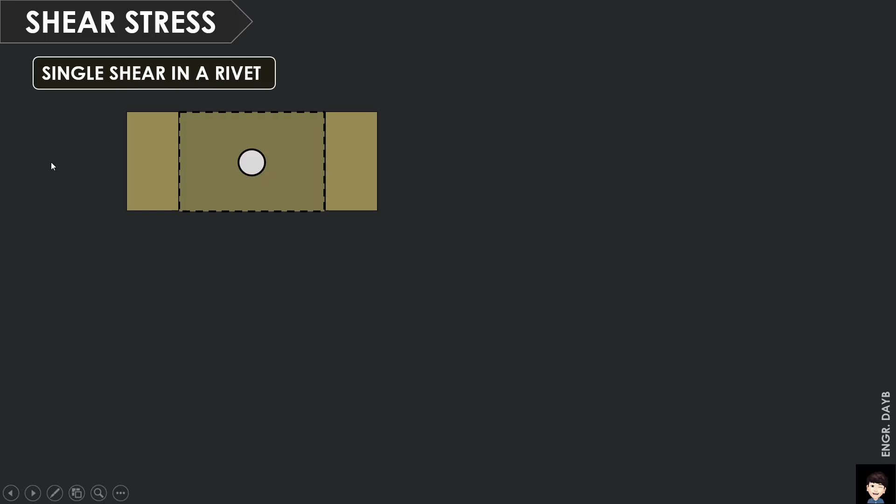Let's use a pointer. This is our rivet, the white or gray part, as a top view. Then this brown part represents your plates.

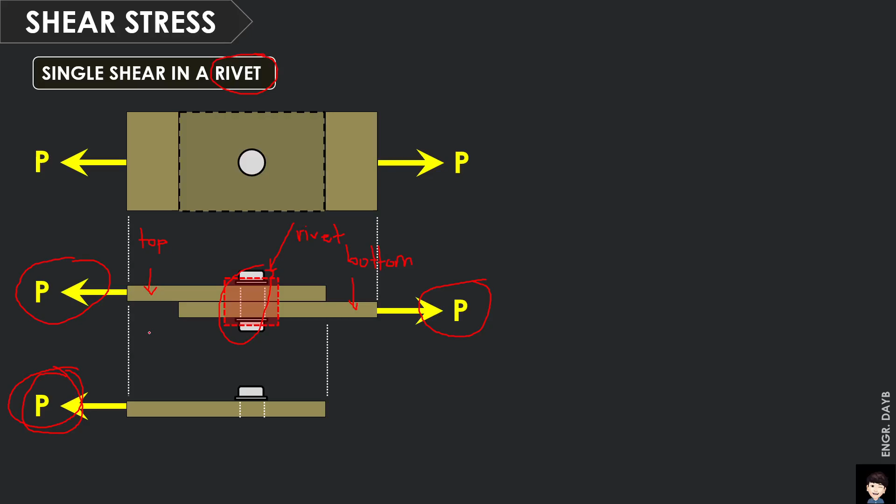Take note that this V is the shear force. Let's recall from the first lecture - shear force. Due to summation of forces along the horizontal, V is also equal to P, knowing that this is just one rivet we're analyzing for now.

So now, if the general concept of stress is equal to force over area, what area should we consider here? Take note, when you say shear again, it means sliding, right? So what slides in the part of the rivet?

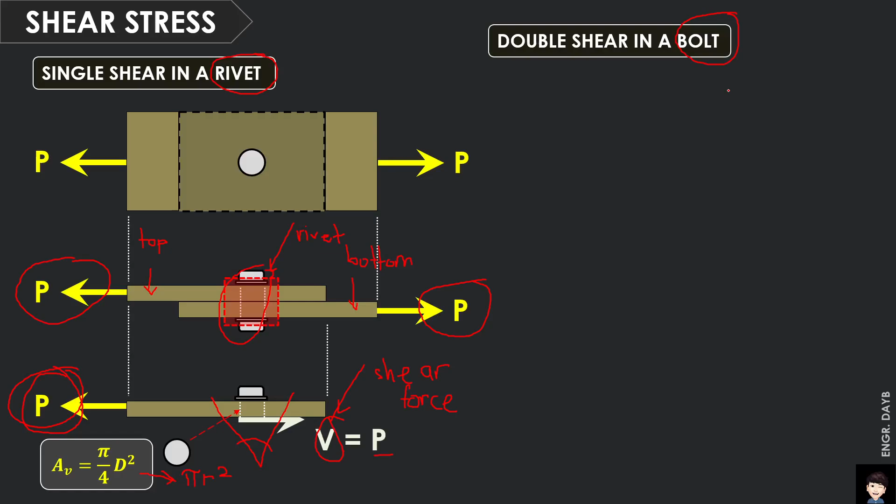Next, how about double shear in a bolt? Yung bolt, guys, almost the same purpose lang din yan with rivet na nagko-connect din ng ilang members o ilang structural members. For example, meron kang ganitong structural member. If I am not mistaken, this is what we call clevis, i-research nyo na lang din. Pero ito guys, ito yung bolt.

I-detalye lang natin para mas mag-gets nyo. Let's say yan yung bolt, then mag-apply ulit tayo ng tension force P. Ngayon, with respect to bolt, knowing the concept of shear, ano ba yung part ng bolt ang magkakaroon ng shear resistance or sliding resistance kapag in-apply natin itong force P. O sige, isolate natin.

Gawa natin ng free body diagram. Kapag in-isolate natin yan, analyze natin yung part na yan, pati ito, itong dalawa. So ito na lang, applying force P. Ngayon, kapag in-apply natin itong force P dyan, anong area o anong parallel area doon sa bolt ang magkakaroon ng shear or sliding resistance?

Imagine na lang guys, hilain mo ito ng P. Therefore, anong magiging reaction ng bolt? Merong isa dito, meron din isa sa kabila. Therefore, if we take summation of forces along that axis, paghahatian po yan ng dalawang shear force. For example, if P is equal to 50, therefore itong V dito ay 25. Same concept sa kabila, 25 din po yan.

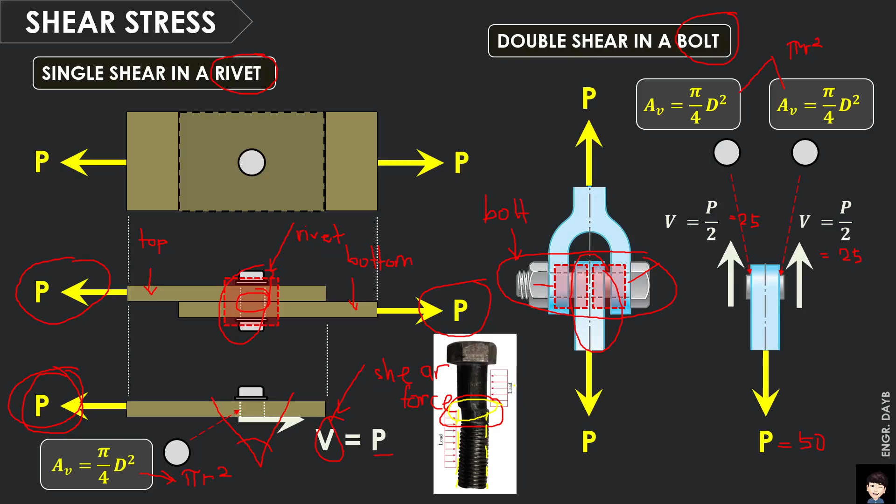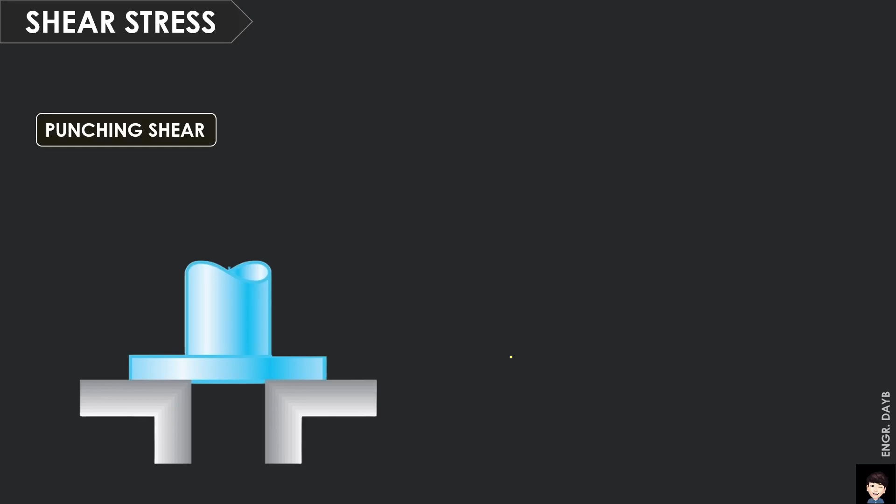Next, how about this kind of shear? May tinatawag din tayong punching shear, ito po yung example niya. When you say punching shear, guys, kindly imagine compilation ng papel - bubutasan nyo using puncher. For example, ito yung papel, tapos ito yung puncher, so yan yung cylindrical punch. Then ito yung metal sheet na lang, kumbaga.

Let's say mag-apply tayo ng compressive force P in order to magkaroon ng butas yung metal sheet. Ngayon, analyze natin yung part na yan - yan yung magiging free body diagram natin. We have this force P. Then, kung mapapansin nyo, since cylindrical po yan, therefore ang magiging cross-sectional area po niyan, yung punch na yan, ay circular din.

Therefore, ang magiging butas niya dun sa metal sheet ay naka-circle din. Tama po ba? So, circle din yung magiging butas po niyan.

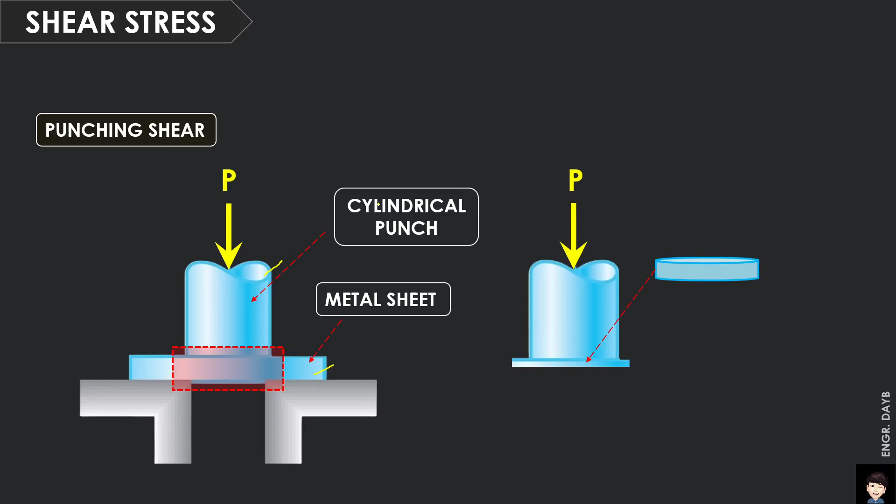Kaso, ang tanong, since we are dealing with shear stress, okay, then general concept is force over area. Ano na naman kayang parallel area ang ma-consider natin dito? Okay? So, we have this force P.

So, take note, parallel area. Meron tayong dimension na D as your diameter, then meron tayong thickness. Kung mapapansin nyo, naka-curve to, guys. Ibig sabihin, yung palibot ng butas na yun, ma-imagine nyo, ito. Yan, sabihin natin ganyan. Yung parallel dun sa butas, guys, yun yung magiging shearing area. Yun yung makikis-kis. Yun yung magkakaroon ng sliding from applying the compressive force P doon sa metal sheet.

Okay? So, there is a series of shear forces, doon sa palibot ng butas, para ma-resist niya yung effect ng P na yan. Hopefully maintindihan, that is also V is equal to P. Kapag tinake mo yung resultant niyan, yung series of shear forces na yan, mag-a-act pa rin yan sa centroid, sa pinakagitna. Therefore, yan yung magiging V natin. So, V, summation of forces along vertical, so we have V is equal to P.

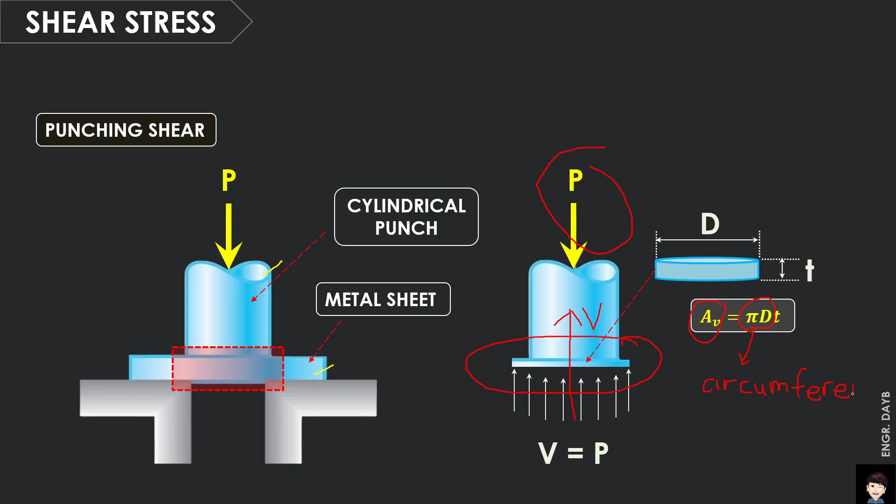Okay? So, therefore, ang shearing area natin is equal to pi dt. So, sir, bakit po pi dt? Take note, since circular yung naging butas dyan, ang general formula kapag punching, so when you say punching, etong pi d na yan, take note, that is the circumference. Kung naalala nyo guys, yung circumference ng circle.

So, sir, paano po naging ganun? Circumference times the thickness. Again, general formula, when you say circumference, that is also a perimeter. Palibot nga po, di ba? So, perimeter. Kahit anong shape pa yan, kung ano pang shape ng butas na yan, general approach, kunin nyo yung perimeter ng butas na yon, then saka nyo i-times ng thickness. Yun yung magiging shearing area.

Para mas ma-imagine nyo pa, for example, meron kang lata, o di kaya itong circular na yan, guntingin mo. So, from the circle, kapag ginunting mo, magiging rectangular yon. Tama po ba? Kapag nilatag mo yung circular na lata, tapos ginunting mo, magiging rectangular yan. Wherein, yung circumference na to na may pi d, kapag ginawa mong rectangular, nandito na yung pi d sa isang side. Then, merong thickness dyan.

Then, solving for the shearing area, approach natin is the area of rectangles. We have length times width. So, we have pi d as your length, then yung width, that is your thickness. Kaya nakuha rin yung shearing area na pi d t. Take note, this is exclusive for circle only. Gagamitan nyo lang yan kapag circular yung naging punching.

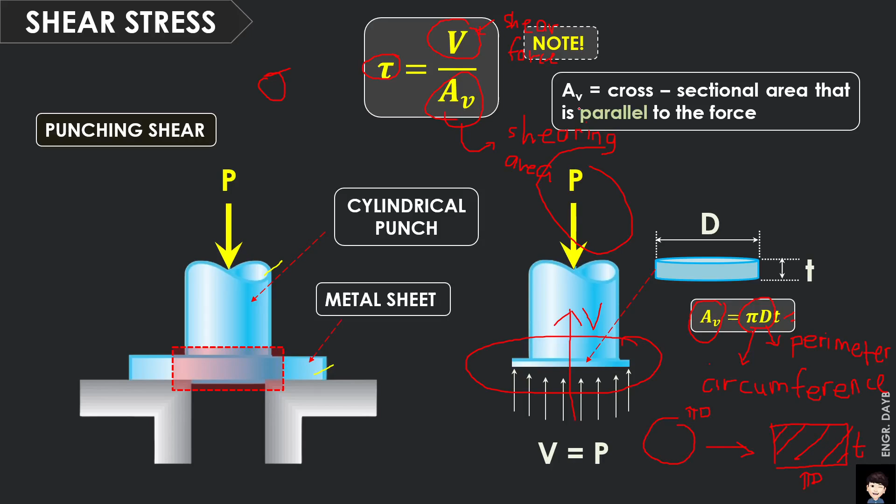So the difference between the normal stress and the shearing stress: kapag normal stress, the force must be perpendicular to the cross-sectional area. Kapag shearing naman, the force must be parallel with respect to cross-sectional area.

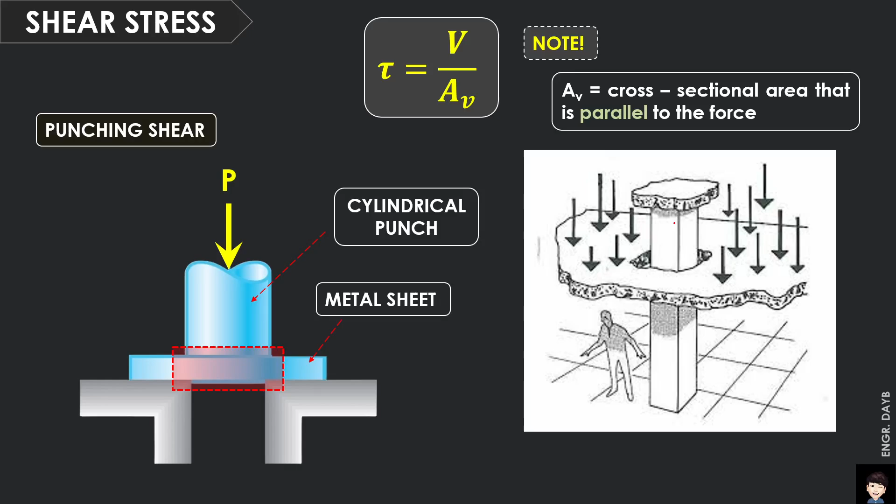Okay? So next, para mas ma-imagine nyo guys, ito yung actual na nangyayari. Bakit ba natin inaaral yung shear stress? Kindly imagine this is a slab, so this is a punching shear failure through a slab or footing. I think you are aware naman kung ano yung ibig sabihin ng slab. Yung slab, mapapansin nyo, yan yung mga floors natin sa building. Then yung footing naman, yan yung part ng foundation natin kapag nagtatayo tayo ng structure.

So kindly imagine guys, this is a column. Then etong bumagsak na to, yan yung mga bigat doon sa slab. Sa sobrang bigat, nagkaroon ng ganitong failure na tinatawag nating punching shear failure. So ngayon, ano naging butas natin diyan?

Kung mapapansin niyo, ang naging shape ng butas dito, hindi circle. Kasi at the first place, hindi naman circular column. Kasi ito ay rectangular, okay? Or pwede natin i-consider as square. So ibig sabihin, kunyari pinapa-compute sa'yo kung ano ang shear stress sa ganitong sitwasyon.

Kung mapapansin niyo, yung force, sabihin natin nandito yung force. Yan yung force P. Kapag niresultant mo yung intensity of the forces dito sa slab, ang magiging shearing area natin, hindi po ito, kasi ito ay perpendicular with respect to cross-sectional area ng column.

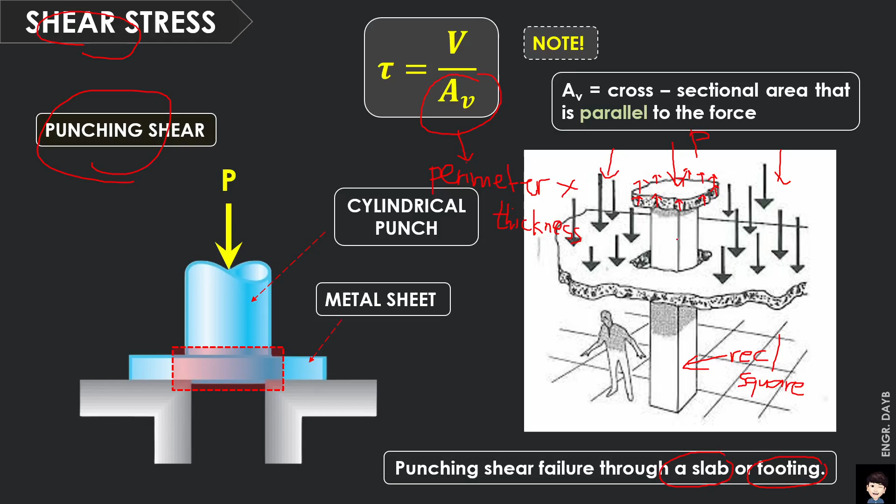Okay, so next, bearing stress naman tayo. Mag-example na lang tayo para mas maintindihan. So this is our example ulit tulad ng una. Meron ulit two plates connected by a rivet, then we apply tensile force P on both plates.

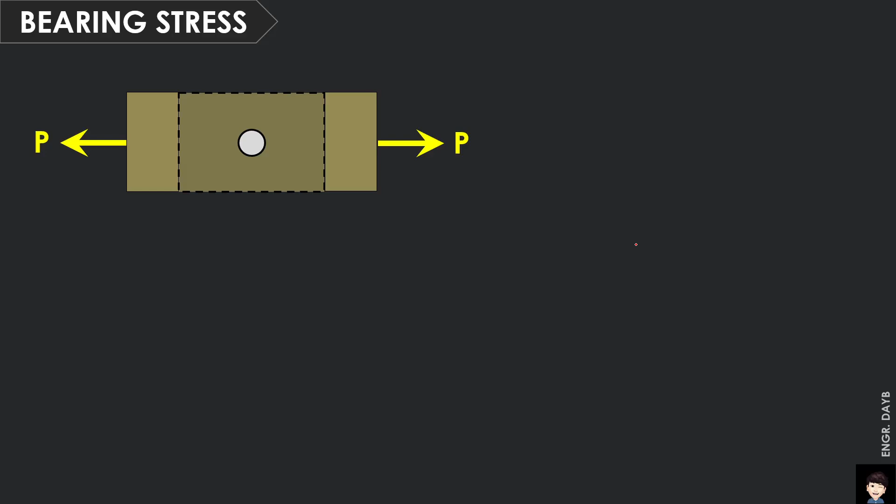Kapag isa-side view natin yan, yan yung top and bottom plate with a rivet. Ito yung body ng rivet. Ngayon, paano naman i-analyze yung bearing stress? Sa ganitong sitwasyon na involve yung plates, ito yung magiging analysis. Sige, mag-cut tayo ng section, then consider natin ito.

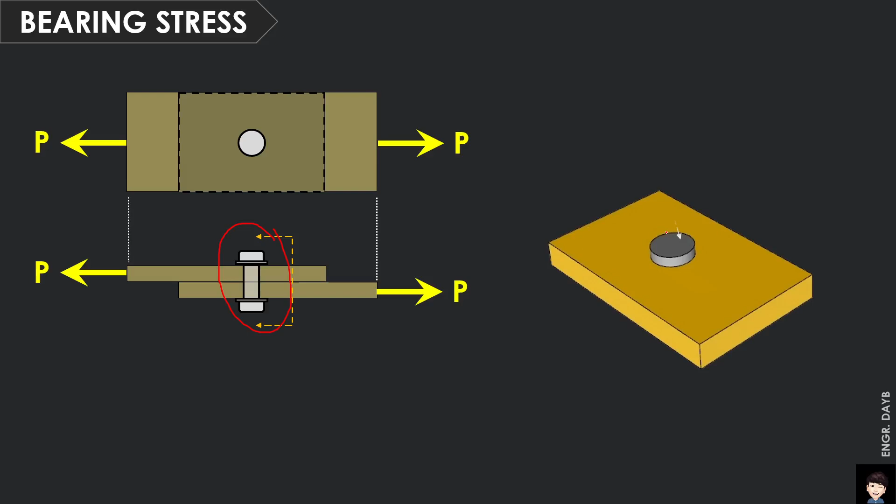Naka-isometric, para mas madali niyong maintindihan. Ngayon, ito ay rivet, at ito ay plate. Nag-apply tayo ng force P. Okay, ang tanong, ano ang magiging area dito?

Para mas madaling matandaan, bearing stress, take note, ay special type ng normal stress. Kaya parang maire-relate natin yan dun sa perpendicular area, kasi special type siya ng normal stress. So ano yung perpendicular area na kailangan natin i-consider dito?

Solve lang muna natin ano ba yung magiging resistance ng rivet na yan with respect to P. Tawagin natin PB, P sub B, bearing force na lang. Kapag sinamation natin ang forces along this axis, PB is equal to P. Kung ito ay 50, for example lang, so for the rivet, magiging resistance niyan ay 50 din.

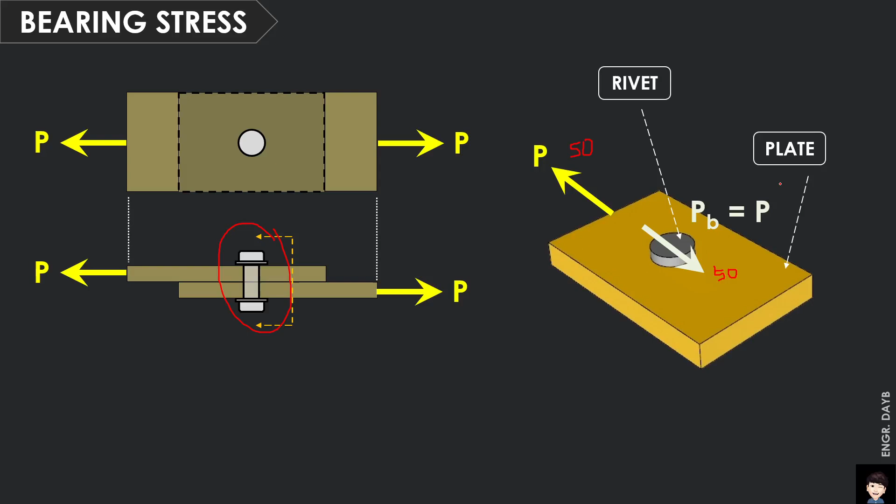Okay, ang tanong, ito po siya, ito ang kailangan natin i-solve: the projected area of the rivet. Kindly imagine in between plate at rivet, ano yung magiging possible failure dyan?

Kapag itong P nagkaroon ng increasing value, nag-increase yan, syempre possible na magkakaroon din ng failure. May tendency din na kapag sobrang lakas na ng force, kapag hinila yung plate sa ganitong side, may iwan yung rivet dyan, pero since this is a projected area, magkakaroon ng butas dito sa plate. Mapapansin niyo, itong projected area na yan, parang area of...

Sige, pakita na natin, area of contact. That is the area of contact between the plate and the rivet. Yan yung kailangan nating i-solve. Paano natin i-solve yan? Itong rectangular na yan, ano yung magiging basis natin for the dimension ng projected area?

We have the diameter. Yung diameter ng rivet corresponds to the isang length nung rectangular na ito, na projected area, times the thickness of your plate. Sa mga ganitong situation, we have this formula, sigma B. Kasi itong sigma B, yung bearing, is also under normal stress.

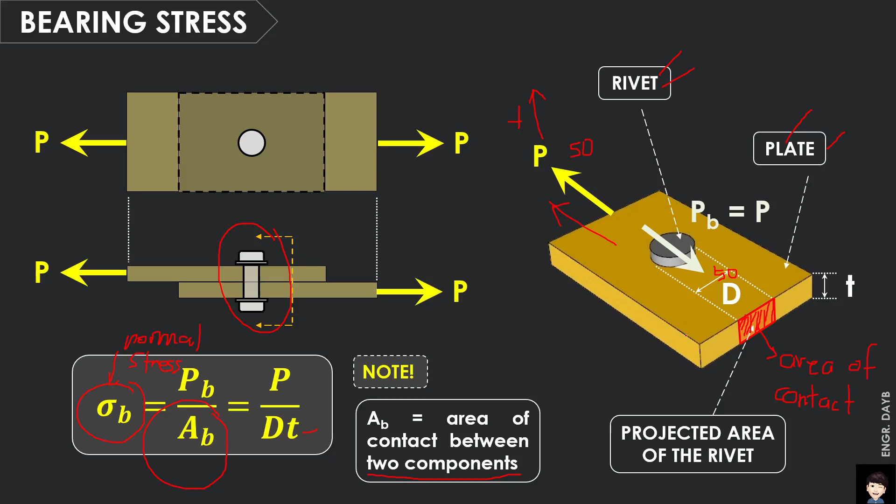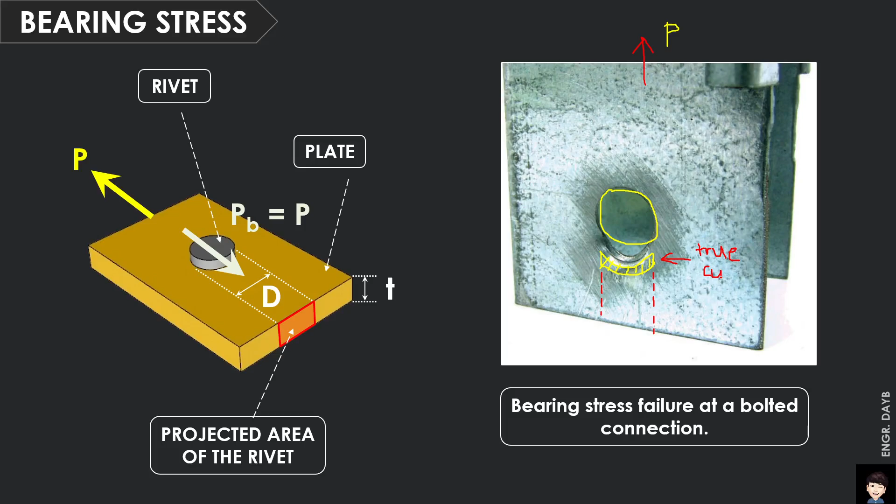Naka-curve, kaso in actual computation naman, guys, mahirap naman pong isolve yan. Kaya nag-consider tayo ng projected area na lang po. Para siyang approximate, guys, no? So in that case, instead of this one, yan yung true area. Sabi natin true area, true curve, area na kailangan nating masolve.

Okay, ito yung thickness kasi, guys. Kung makikita niyo, ito yung thickness ng plate. Yan yung thickness ng plate. Ito ang kakailangan natin consider. Itong part na to times yung thickness ng plate. Sorry, medyo hindi perfect yung rectangle. So may thickness diyan, then ito corresponds to the

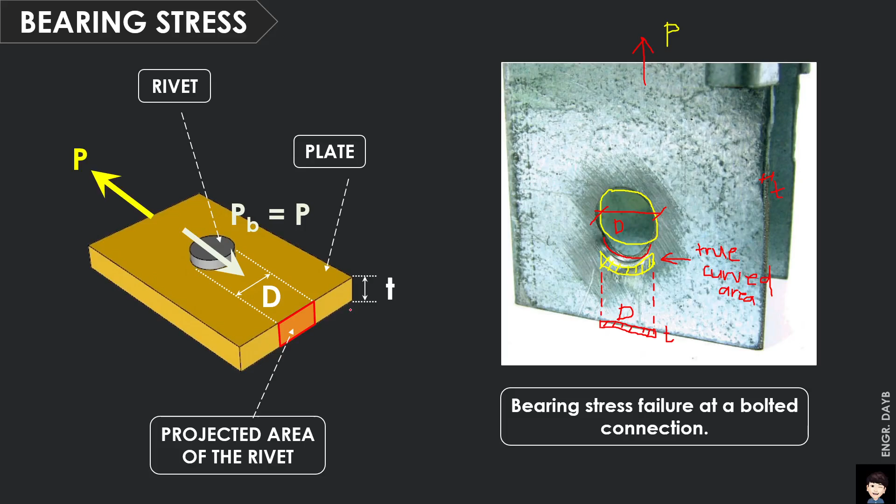diameter. So yan yung diameter ng bolt. Okay, diameter ng bolt times the thickness ng plate. Na instead of curved area, mahirap po kasi to, guys. Mahirap to, no? So ginawa na lang, approximation na lang, kaya siya naging rectangular. Okay, so hopefully nasundan yung concept ng shear and bearing.

So let's solve, problem solving. So problem number 1. A hydraulic punch press is used to punch a slot in a 0.50-inch thick plate as illustrated in the figure. If the plate shears at a stress of 30 KSI - o take note guys naka-English po tayo, inches, KSI. So when you say KSI, kilopounds per square inch.

So determine the minimum force P required to punch the slot. Okay, so ito yung figure natin. Then plan view of slug, ito yung itsura ng butas na makikita niyo po dito. Okay, yan yun, no? So kindly imagine, guys. So ito, it is an under - okay, or this problem is under punching shear. Okay, ang pinapakuha sa atin, ano daw itong minimum force P na yan, required to punch the slot.

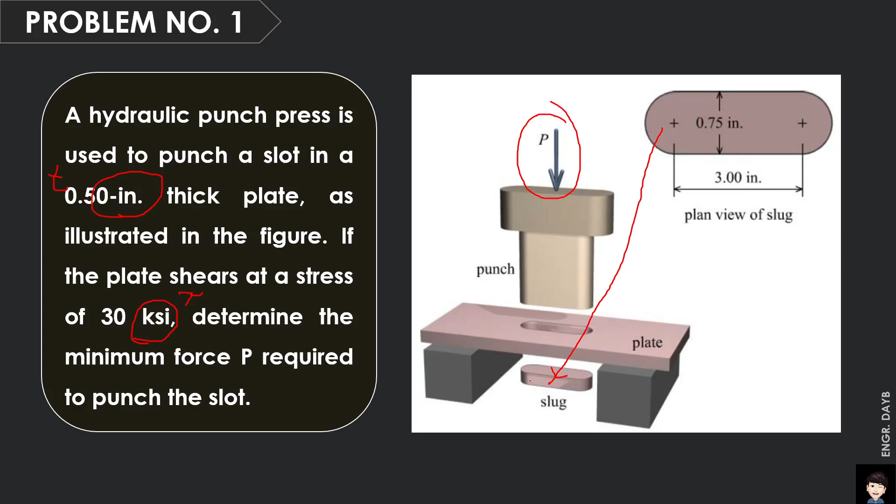Okay, so lagi na natatandaan, force over area. But since shear yan, force over parallel area. Okay, binigyan ka ng shears at a stress, so that is the tau. Okay, then binigyan ka ng thickness nung itong slug na yan, no? Slug, o yung plate na yan - yung plate pala rather, plate. Okay, sige, solve natin.

So kung papansin niyo guys, again, this is a punching shear. So the general concept kanina is perimeter. So guys, hindi na po ito pi-d-t. Okay, take note, yung pi-d na yon is exclusive for a circular punch, no? Kaso ang tanong, itong shape po ba yan ay considered as a circle? Siyempre hindi po, ano? So kung papansin niyo, para siyang pinag-combo na kalahating circle dito,

tapos may isang rectangle. O imagine niyo na lang, parang spam - yan, spam sa bahay niyo. Okay, yung delata na spam, di ba, ganyan yung itsura niyan. So imagine niyo, kapag tatanggalin niyo na yung laman ng spam, di ba, ipupush niyo, tama po ba? Siyempre bubuksan niyo both sides, then ipupush niyo yung spam. So yung pag-push niyo, yan yung considered as force P. Okay, so sige, ito yung magiging ano natin.

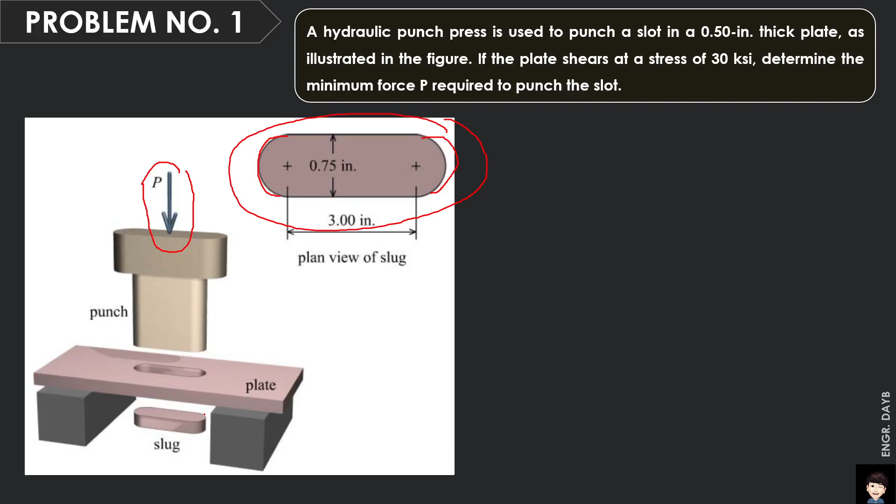So alam na natin na yung force P is also equal to the reaction dun sa part na magkakaroon ng shearing resistance. Okay, kung mapapansin niyo, itong slug na to, na tinatawag na slug, so sa palibot niyan o sa perimeter po niyan, doon magkakaroon ng series of shearing forces. Okay, na kapag niresultant mo yan, okay, it will act at the center, okay, along the axis of P, so that is also a V. So that is the shearing force now. So if you take summation of forces along vertical, V is also equal to P.

Starting from this concept, tau or the shear stress is equal to V over A sub V. Take note, this is 30 KSI, that is the shearing stress, is equal to V. We also need to get this since there's no force over A sub V given. Let's begin, guys.

If we take a summation of forces along vertical, V is also equal to P. Then for A sub V, take note, A sub V corresponds to, in punching shear, the perimeter times thickness. If the hole is circular, automatically it's pi times d times t. But here it's not circular, so in general, perimeter times thickness.

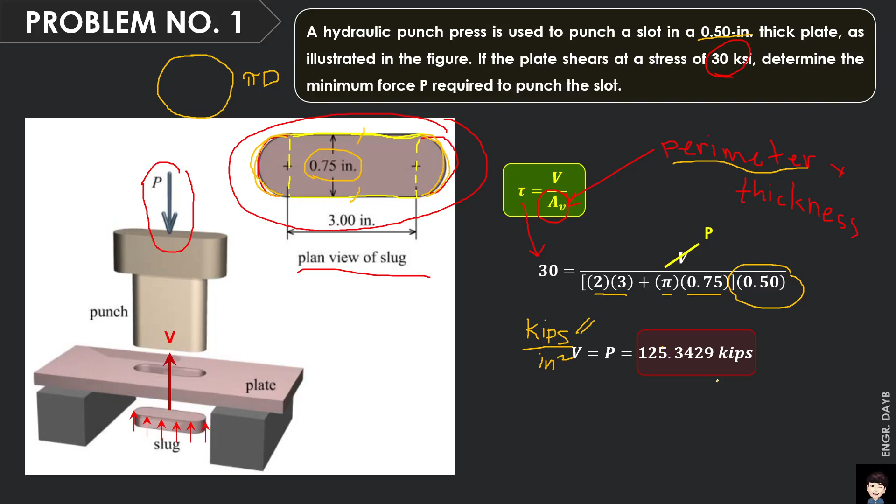Okay, next, problem number 2. The beam shown in the figure is supported by a pin at C and by a short link AB. If W is equal to 30 kN per meter, determine the average shear stress in the pins at A and C. Each pin has a diameter of 25 mm. Assume the length is equal to 1.8 meters and the angle is equal to 35 degrees. Let's visualize the problem first.

If you notice, this is a different problem now, not punching shear anymore. Here, given is W is equal to 30 kN, that's the uniformly distributed load or UDL, as you know from your statics, a rectangular load. Then determine the average shear stress in the pins at A.

This is the pin. Pins at A and C. Each pin has a diameter of 25 mm. The length is equal to 1.8, then 35, this angle here is 35 degrees. So how do we solve this kind of problem?

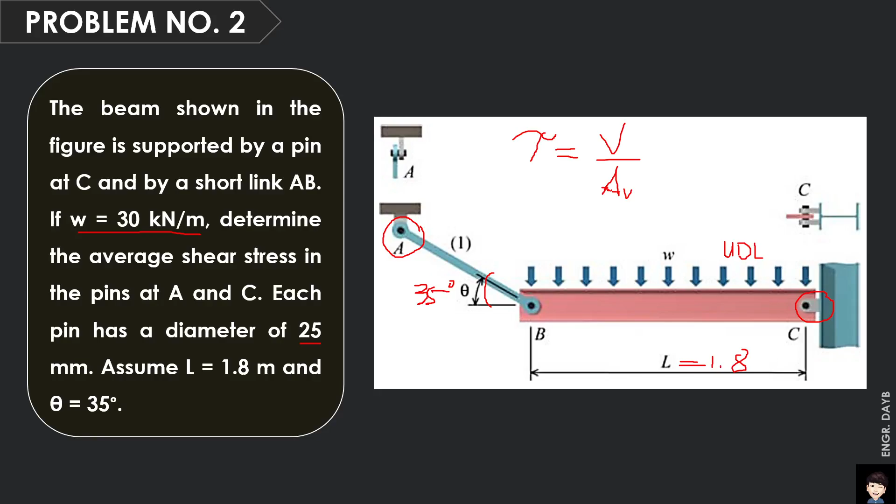Since we are dealing with pins A and C, kailangan muna nating malaman kung ano yung force na dadaan o mag-i-slide dun sa A at C. Shearing stress po yan, pero binigyan ka naman ng diameter so wala ka ng problema. Ang shearing area pagdating sa pin, parang rivet lang, is the area of circle, automatic. So masolve nyo na yan, pi over 4 d squared, o pi r squared kung gusto nyo kalahatiin yung diameter into radius.

Sige, solve natin guys. Replace natin yung mga values. We have W is equal to 30 kN per meter. Then we have the length equal to 1.8 meters.

Since pin yan, therefore we have two possible reactions. Kayo nang bahala mag-assume, guys, sa statics, pero para mas mabilis, gagawin ko na lang upward itong vertical reaction sa C, kasi puro downward yung nararanasan niya due to UDL, Uniformly Distributed Load. So we have C sub y. Tapos yung horizontal niya, gawin natin going to the right. Sir, bakit going to the right?

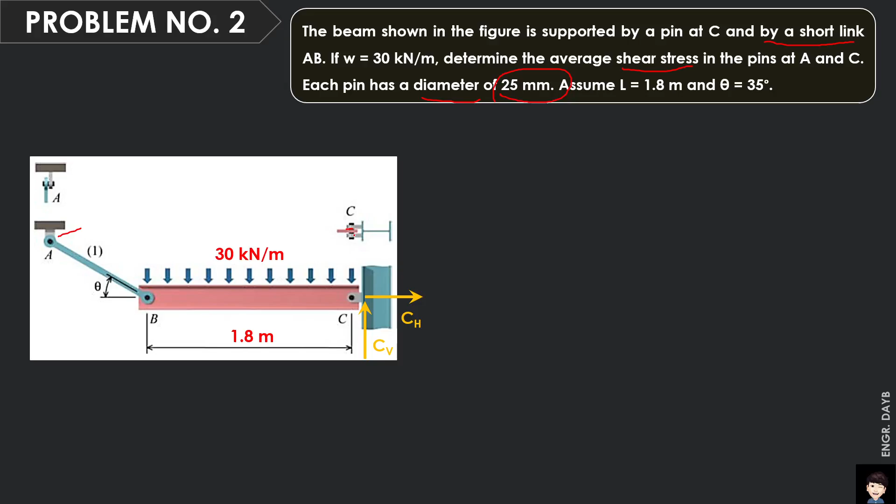So next, analyze natin yung mga pins. Kung mapapansin nyo, etong pin C natin, parang tinapay, tama po ba? Merong bun, merong palaman. Therefore, is it single shear or double shear? Yan yung kailangan nyo rin i-consider, guys. Pagdating sa mga connection, pin connection po ito, so in this case merong dalawang area, isa dito sa taas, isa dito sa baba. Therefore, we need to consider the pin C as double shear.

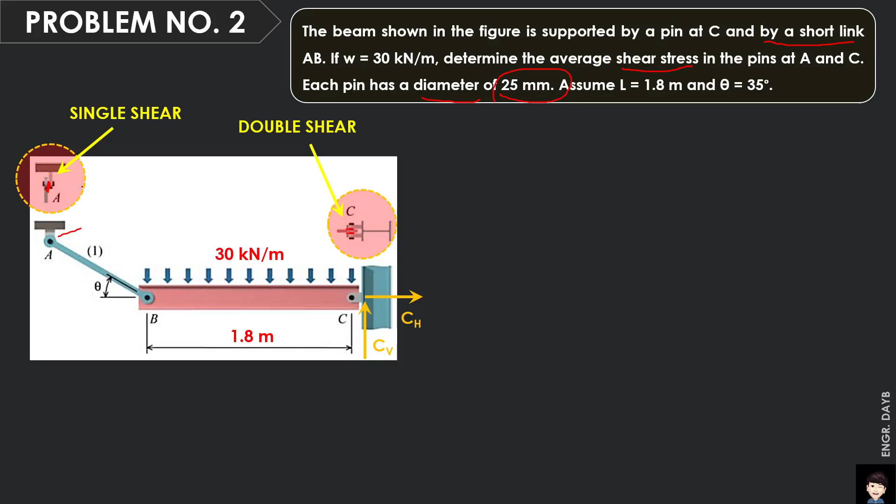How about point A or pin A? Isa lang po yung mag-shear dyan, ito lang po yun. Therefore, ang computation natin dyan must be single shear. So hopefully nakita nyo na yung difference between the single shear and double shear.

Then analyze natin yung force dun sa link. So cut natin yung link para lumabas yung internal force. Ayan, yan yung mga basic concept natin guys. So ito yung magiging RB natin, let's call it reaction at B na lang. At since naka-inclined, consider natin yan based sa given, which is equal to 35 degrees with respect to horizontal.

Sige, solve natin yung mga forces kasi yan yung kailangan natin para ma-solve si stresses. Dito, ang ginawa muna natin is summation of moment about point C is equal to 0 para ma-solve natin yung RB. Since naka-incline yung RB nyo, gawin nyo munang components. So this is RB. Since given yung 35, so this is RB sine of 35, then this is RB cosine of 35. Basic na yan sa inyo, no, kasi statics.

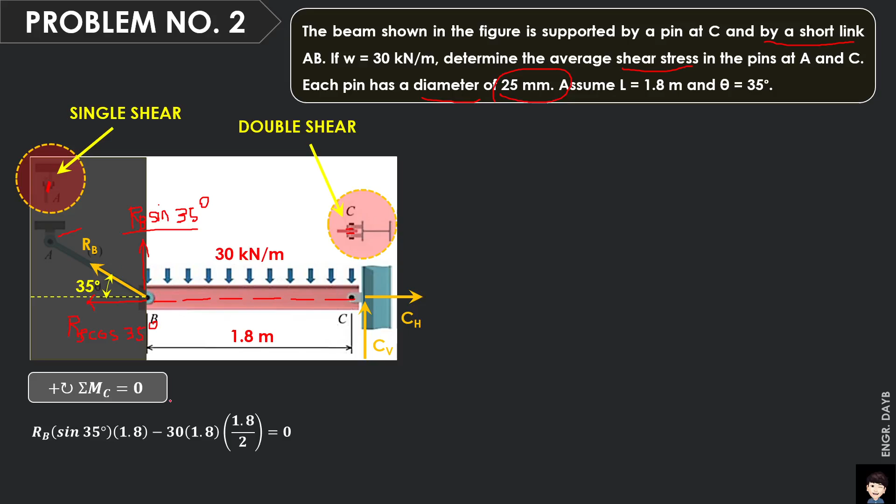Ngayon, kapag moment tayo sa C, mawawala itong RB cosine 35 kasi yan po ay dadaan sa point C din, therefore walang perpendicular distance. So paiikutin lang natin dyan is this RB sine of 35. Clockwise positive tayo as our sign convention. So we have RB sine 35 degrees times perpendicular distance na 1.8 meters, minus 30 resultant natin, guys. Ito, resultant muna natin dito, 30 times 1.8, then the perpendicular distance, ito yon, so kalahati ng 1.8, we have 1.8 over 2 equal to 0. Since ikot yan counterclock, therefore we have negative. Solving for RB, we have 47.0731 kilonewtons.

Next, solve naman natin yung CV and CH. Summation of forces along horizontal na lang muna. So we have negative RB cosine of 35, kasi going to the left, plus CH equal to 0. Automatic, CH is equal to, replace muna natin yung RB as 47.0731. Kindly make sure guys na tama yung RB natin, kasi kapag mali yung pagka-solve natin sa RB, yung succeeding steps natin magkakamali na rin yung values. So please be careful sa pag-solve pa lang ng reactions. Solving for CH, magiging positive na po yan, so we have 38.56 kilonewton going to the right.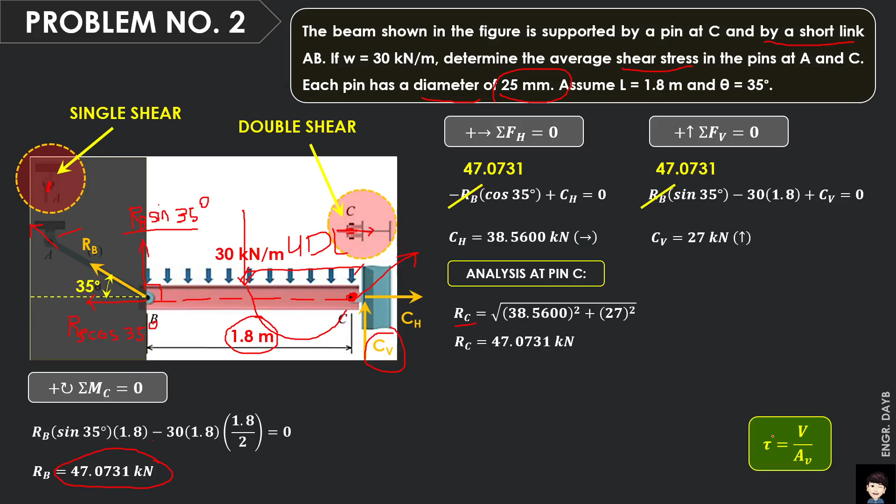So that RC is what we will use as the total shearing force at C. We have the same concept to solve for the shearing stress. So the shearing stress at C is equal to...

47.0731 - take note, I multiply this by 1,000 first to convert to Newton, because our goal is always to get megapascals. So this is kilonewton, then convert it to Newton by multiplying by 1,000, over the area.

Take note, the area affected at C is double - two areas - therefore we need to consider the double shearing area. That's why we have a multiplier of 2 times the area of the circle, since our pin C has a diameter of 25 mm. So pi over 4 times 25 squared.

Solving for the shearing stress at C, we get 47.9483 megapascals. Take note again, unit analysis: this is Newton on top over square millimeters, that's why Newton over square millimeters also results in megapascals. Refer back to the first topic.

Same concept with the analysis at pin A, it's the same. Since the total RB will pass through A, it will create a shearing effect there. So let's proceed directly.

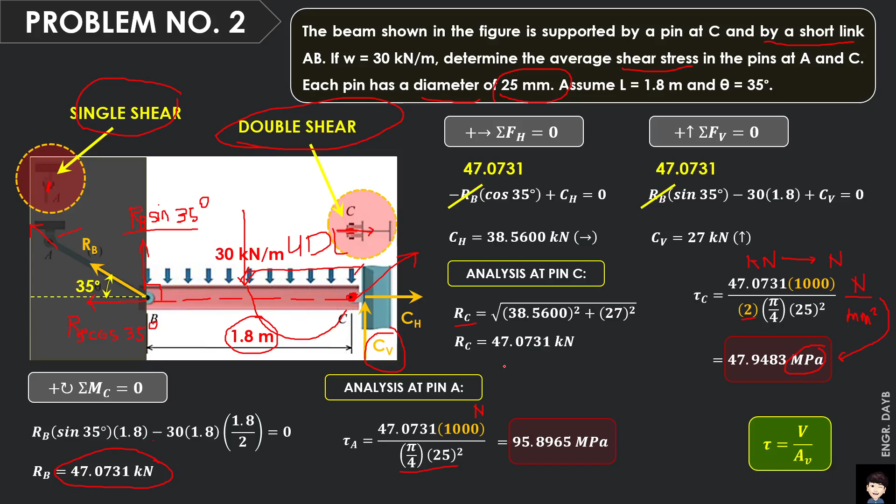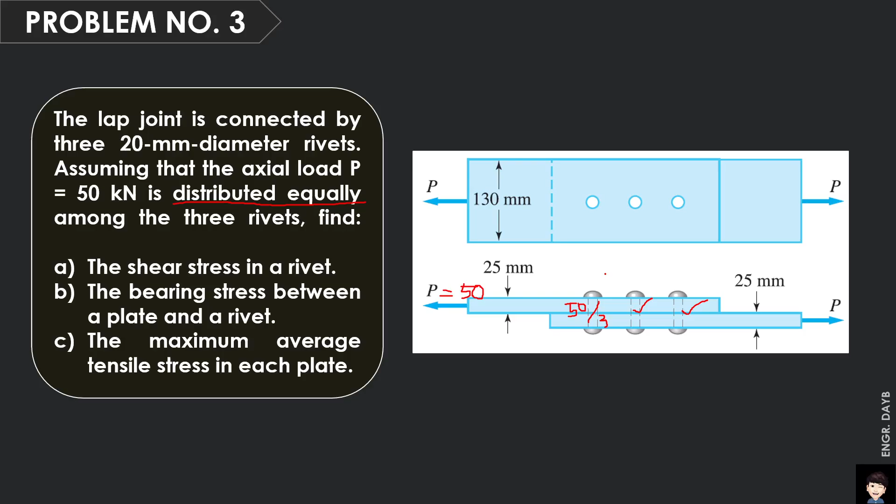So, shear stress in a rivet. Take note, analyze just one rivet. Okay, let's draw the free body diagram. Consider the top or bottom plate - let's just consider the top plate since it has the same effect as the bottom plate.

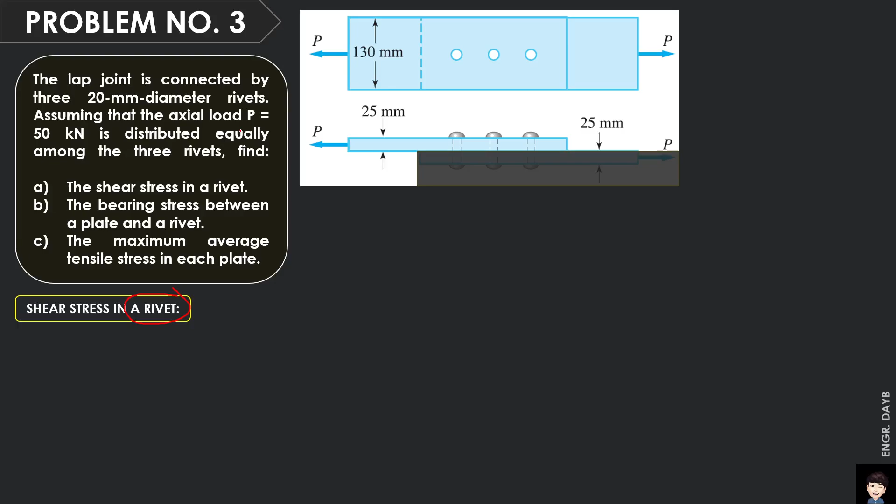Based on the given problem, the 50 kN P is distributed equally among the three rivets. So if this is 50, each rivet will resist, equal to V. Each rivet resists along the horizontal, including this third rivet. So each shear force must be equivalent to P over 3. If it were just one rivet, V would equal P - that's 50-50. But since there are three rivets, each rivet gets 50 over 3.

So that's the same concept again, guys. Take note, check first if it's single shear or double shear. Since only one area is affected - just this part of one rivet - therefore it is concluded as single shear. Unless there's another plate here, like two pieces of bread with filling, or a top, middle, and bottom plate - that's when you get double shear.

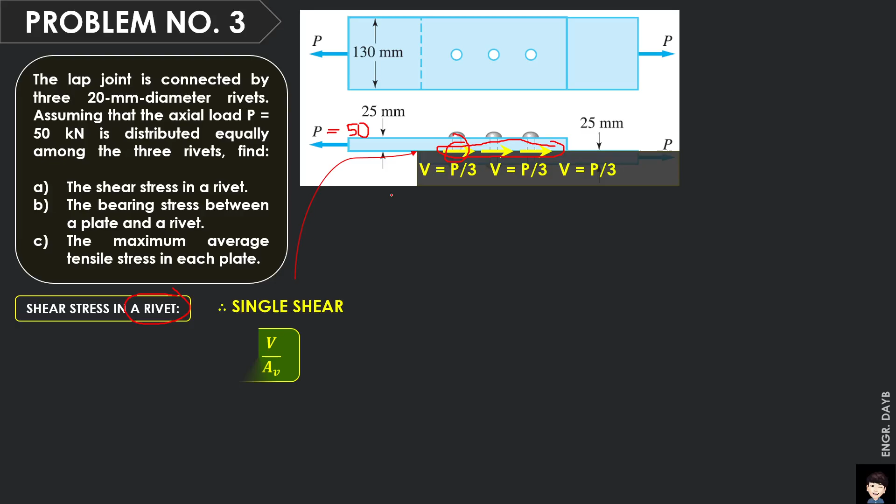Okay, let's solve. Shearing stress is equal to V over A sub V. We have V, wherein V is equal to P over 3, so we have 50 over 3 kilonewtons. But we need to multiply by 1,000 to convert it to newtons.

Since single shear is the approach, there's only one area. So pi over 4 times 20 squared, since we have 20 mm diameter for each rivet. Upon solving, we have the shear stress in a rivet equal to 53.0516 megapascals.

Hopefully that part was followed. Now, how about letter B? The bearing stress between a plate and a rivet. If you notice, guys, when asked about bearing stress, it always involves two materials. So again, two materials, two contact areas must be considered in order to solve for the bearing stress. Now, what is the contact area between a plate and a rivet?

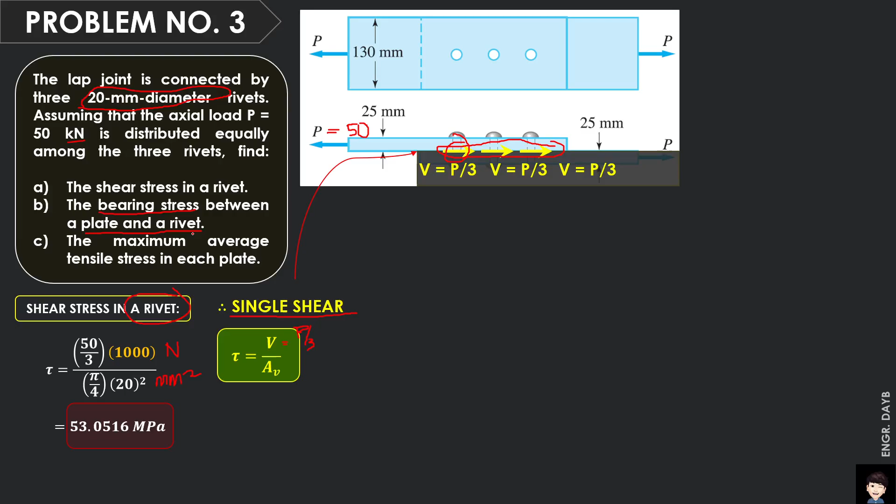Let's solve the bearing stress between a plate and a rivet. This is the orientation again - for a rivet here, similar concept as before, a tensile force P is applied, so the resistance of the rivet, the bearing force PB, is equal to P. That's if it's just one rivet, but now there are three.

Therefore it's no longer equal to P. Let's relate that to this rivet - it's not automatically just P, it becomes P over 3. So since we're still dealing with bearing stress, what we consider is the projected area of the rivet, because that's where the failure would occur in terms of bearing stress. Solving for this, bearing stress sigma is equal to PB over AB. In this situation, we have P over DT, where DT is the projected area of the rivet.

Let's substitute: we have 50 over 3 times 1,000, again converted to newtons, over DT. Our diameter is equal to 20 mm, and the thickness of the plate is 25 mm. Solving, we get 33.3333 megapascals. Then for letter C, the maximum average tensile stress in each plate.

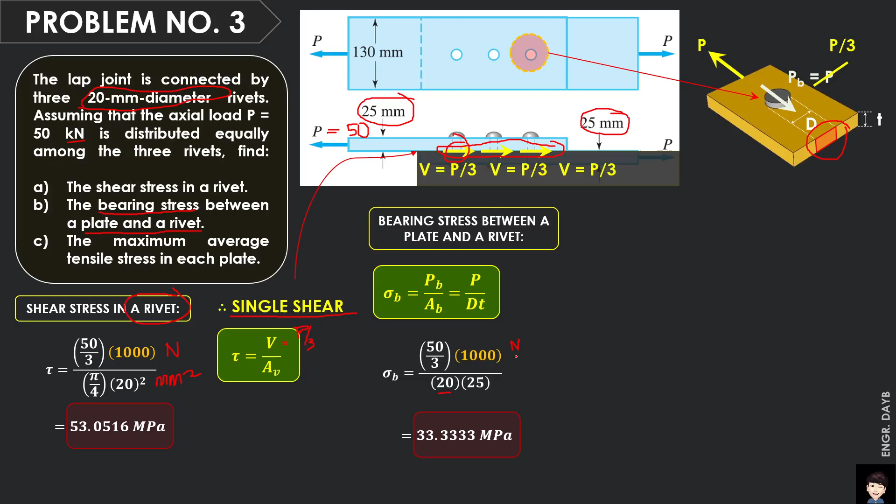This part, guys, is a bit challenging to think through, but let's extract the concept. We're asked about tensile stress. When you say tensile stress, it is the stress due to the effect of the tensile force - our tensile force here is P. When we say tensile, it comes from normal stress, because normal stress can be tensile stress or compressive stress, depending on the application of the force, whether tension or compression. In this case, our plate undergoes tensile stress due to this tensile force P of 50 kN.

Since it's stress, we need force over area. Another question: what area should we consider now? Since tensile stress is under normal stress, the area must be perpendicular with respect to the orientation of the force - so it's this one, guys. So the maximum average tensile stress in each plate - if you notice, it's similar to the bearing approach, except what we consider here is the application of P. So I just flipped it around, guys - it also has a P.

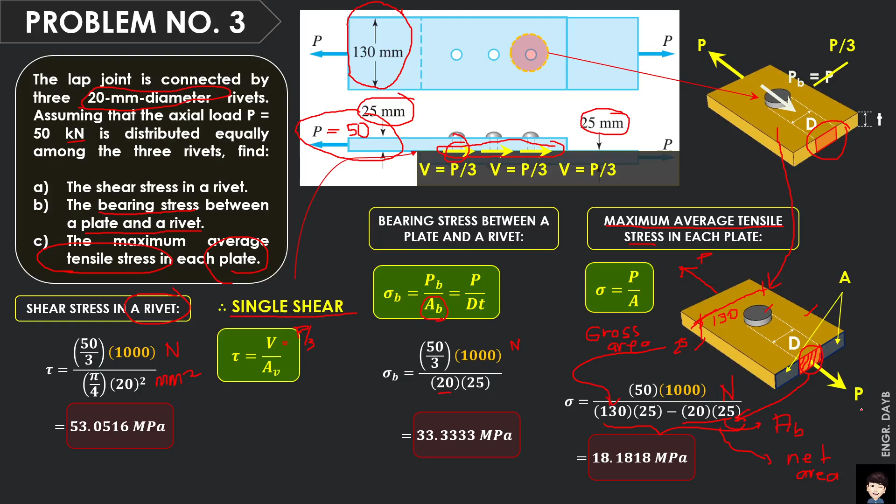Next, for the last problem, problem number 4. A steel pipe column supports a load of 11 kilopounds. The steel pipe rests on a square steel base plate, which in turn rests on a concrete slab. Letter A, determine the bearing stress between the steel pipe and the steel plate. Letter B, if the bearing stress of the steel plate on the concrete slab must be limited to 90 psi, what is the minimum allowable plate dimension A?

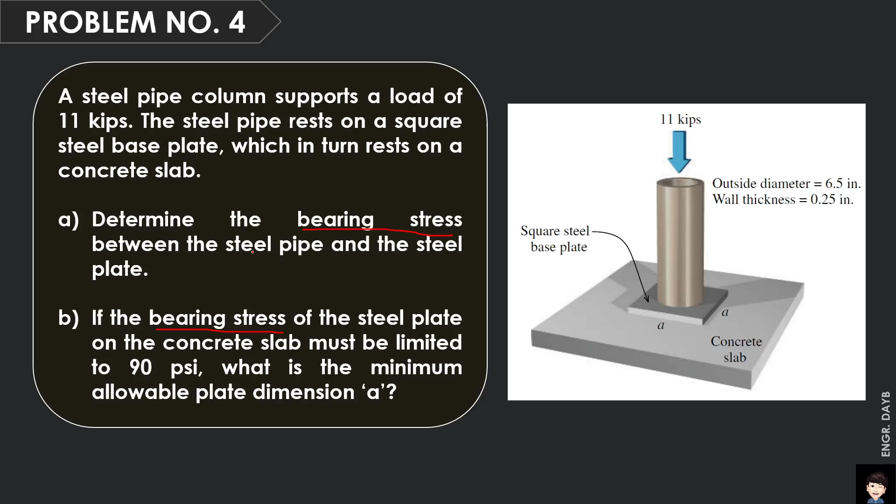Again, as I mentioned earlier, bearing stress is a special type of normal stress. If you notice, the 11 kilopounds with respect to the cross-sectional area, for example this steel pipe, is perpendicular. Same here with the base plate, when you project the line of action of the force, when it hits the steel plate, it's perpendicular. Same with the concrete slab.

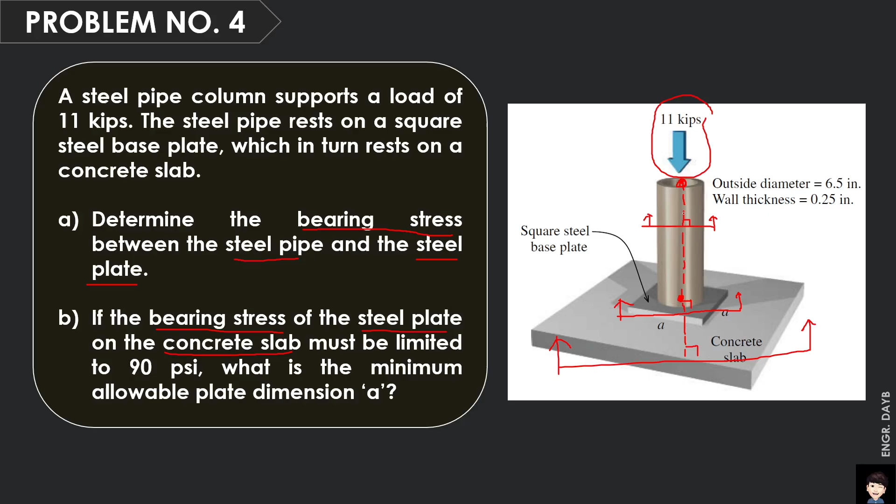So, letter A, let's determine the bearing stress. So, bearing stress between the steel pipe and the steel plate. In that case, guys, we need to isolate the system of the steel pipe and the steel plate. So, to make it faster for us to imagine, let's check the top view. Let's look from the perspective of the application of the force, which is this 11 kilopounds.

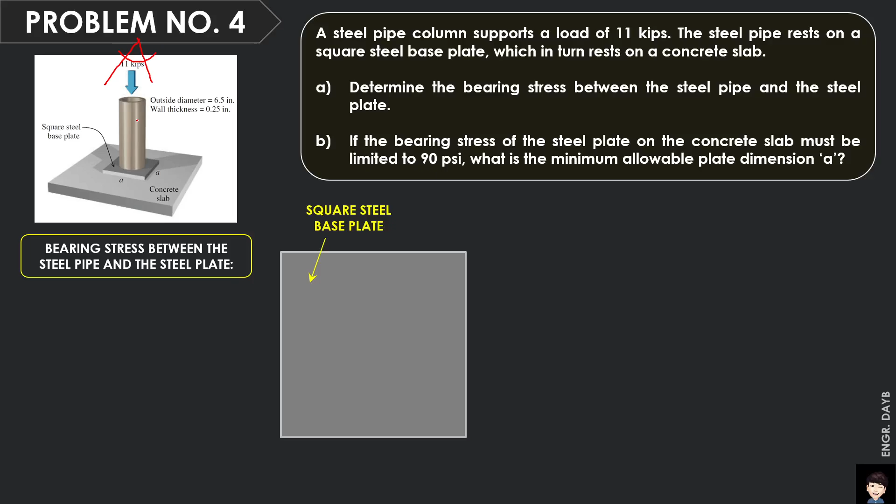Okay, so steel pipe column. Now, since we have two materials, we've identified the contact area or bearing area between these two materials. Let's look at the application of the force. It hits right at the centroid, wherein, as you can see, the centroid of the steel pipe coincides with the centroid of the steel base plate. When you say coincide, guys, it means same location.